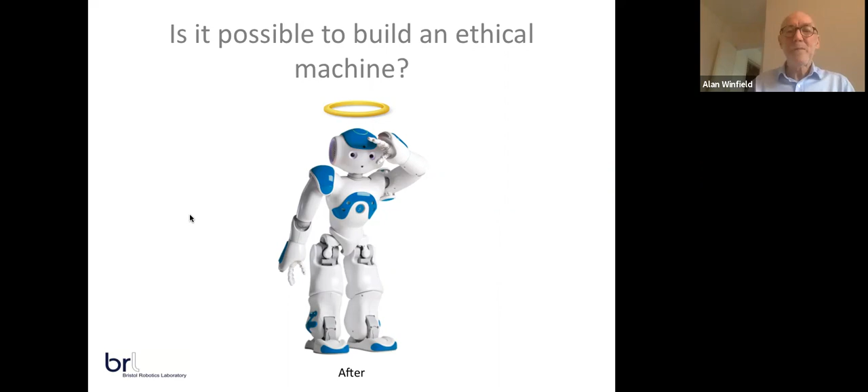Well, a long time ago, 10 years ago, I thought it was completely impossible, but I've changed my mind. And I'm going to show you how I changed my mind, what caused me to come to the view that it is possible to make at least simple ethical machines.

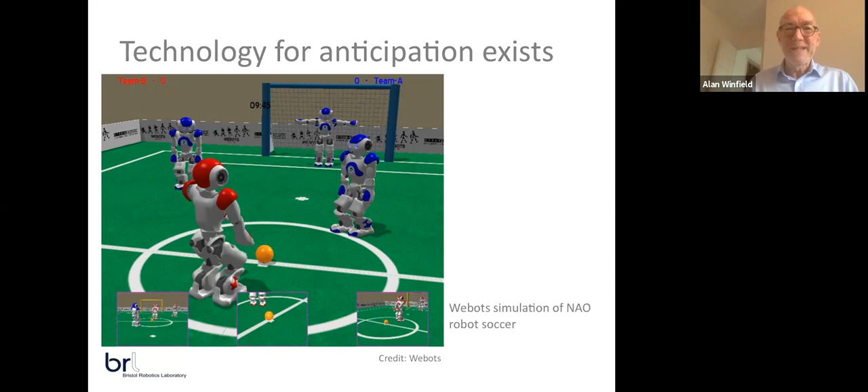And you can even see little images on the bottom looking through the cameras, the eyes if you like, of the individual robots. So robot simulation is a powerful technology. It already exists. We use it routinely to test out ideas in robotics in simulation before then trying them out on the real robot. It's quicker to do that and often less expensive.

Because of course if the idea doesn't work, then no physical robots or people indeed have been harmed by using the simulation. But the idea of putting a simulation of a robot inside that robot is very, very difficult. It's not new - I didn't come up with this idea, the idea of what is called simulation-based internal models, but not many people have done it. It's very hard to do technically. But nevertheless, we have achieved it. And this is the only bit of technical detail that I will give you, apart from that little bit of code earlier, or pseudo code.

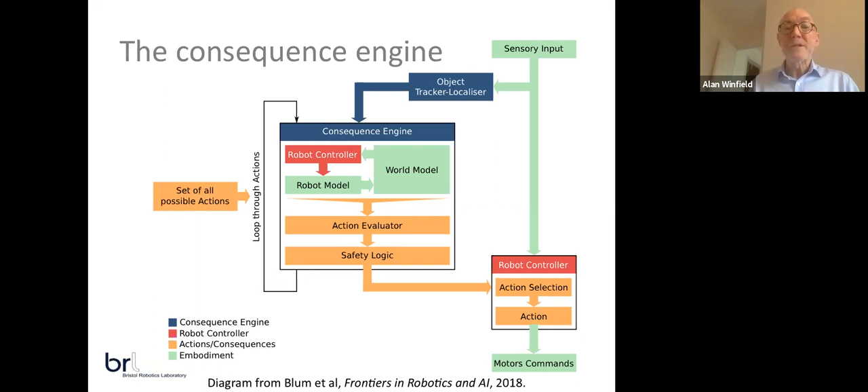And in the case of my simple thought experiment, it was 4 next possible actions. And for each of those, you look at what happened at the end of that simulation run, i.e. 10 seconds into the future typically, and then figure out how that applies to the logic. This picture shows a safety logic, but in fact what we'd actually do in the ethical robot is put an ethical rule - the ethical rule I mentioned earlier would be the logic that goes into there for a simple ethical robot.

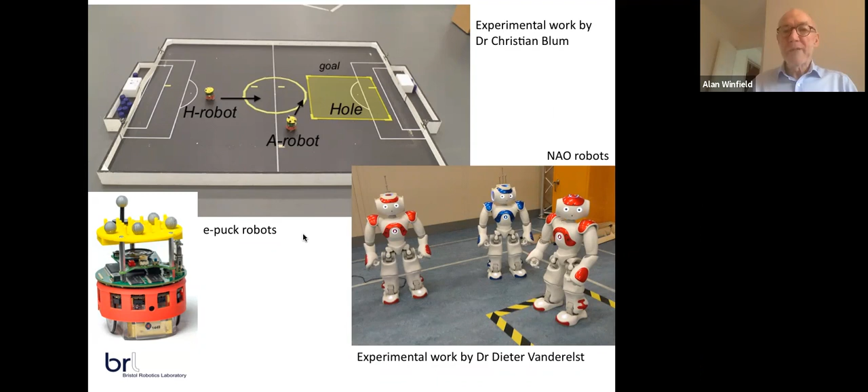The A robot also has its own objective, and rather confusingly it's called a goal, a goal position. So the A robot is also trying to avoid falling into the hole and is going towards that position - so it has something to do. In other words, the A robot isn't just sitting there waiting, but is actually moving towards its own goal position. So let me show you first the results of this particular experiment - this is the paper that we published back in 2014.

So you'll see initially the H robot, which is right there, and you can see the A robot starts to move, then notices the H robot, and there's a gentle collision. The H robot is heading off safely, and the A robot doesn't fall into the hole and goes to its target position. You can see we've speeded this up 4 times, 16 times, and 64 times. I think quite easily you can see that it works.

Let me explain a little bit of the technical side for those of you interested. The consequence engine is running twice every second. And for each of those half-second cycles, the consequence engine is actually simulating not 4, but 30 next possible actions. And for each of those next possible actions, it's simulating 10 seconds into the future. So that means every half a second of real time, we're actually simulating 300 seconds of potential future.

So it really is possible, and we're not using any supercomputer. It's simply running on a laptop, a regular laptop computer connected over the Wi-Fi network with the e-puck robot. So it's not computationally intractable, which is really obviously important. This technique wouldn't work if it required immense computation.

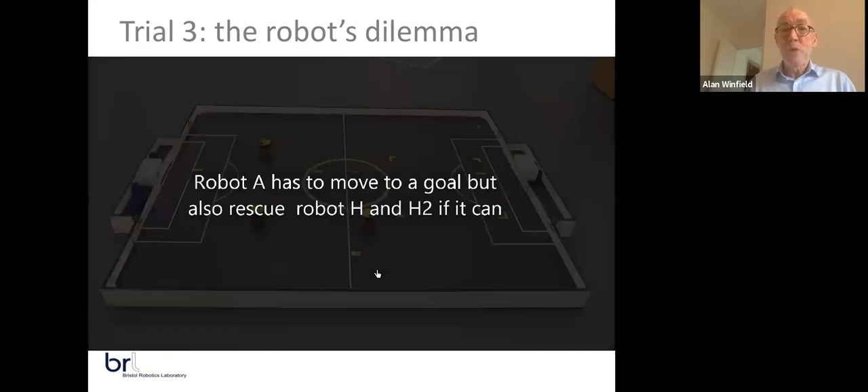So it was really, I'm just running that again. It was really puzzling to us as to why the A robot wasn't saving one of them every time, because we know it can. And it's this dithering that is the reason.

Essentially, we realized that the problem is that our A robot has the opportunity to change its decision, to change its mind, because it doesn't have a mind, but to change its decision every half a second. So that means that the robot is effectively

indecisive. It's a little bit like imagine that you're out at the park and you see two children rushing towards a lake, and it's unsafe, and you want to save them. And if you run towards one of the children, then change your mind and run towards the other one, and then change your mind again, if you do that, it's unlikely you'll save either of them. So being indecisive in this kind of real-time ethical problem is itself a problem.

And we realized that there needs to be an additional mechanism so that ethical decisions are, if you like, a little bit sticky. So ethical decisions have a half-life, that they're not simply superseded in the next cycle. And we think that would improve the performance of this ethical robot.

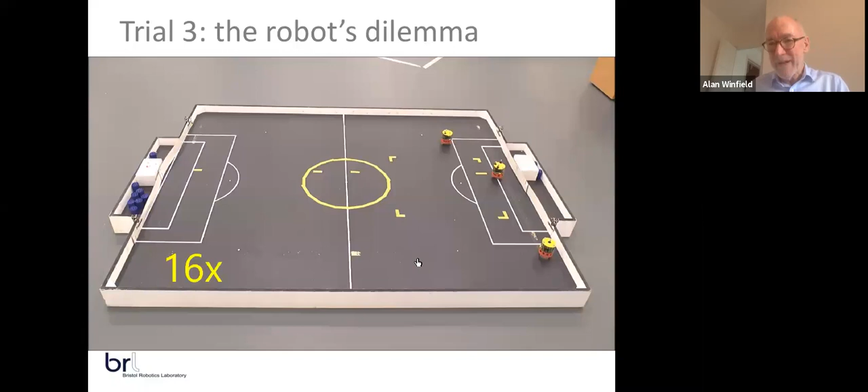But it was nevertheless extremely interesting, and the paper that we published ended up creating a bit of a fuss, both in the media and among the academic community, and it's been very widely cited now, this particular paper, largely because of the ethical dilemma, not so much because of the architecture.

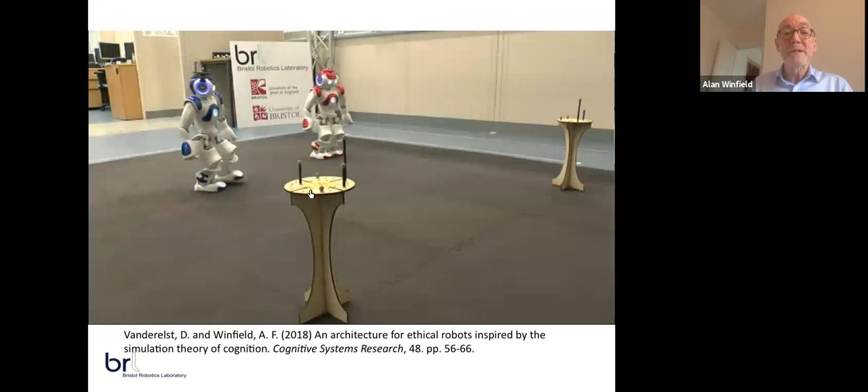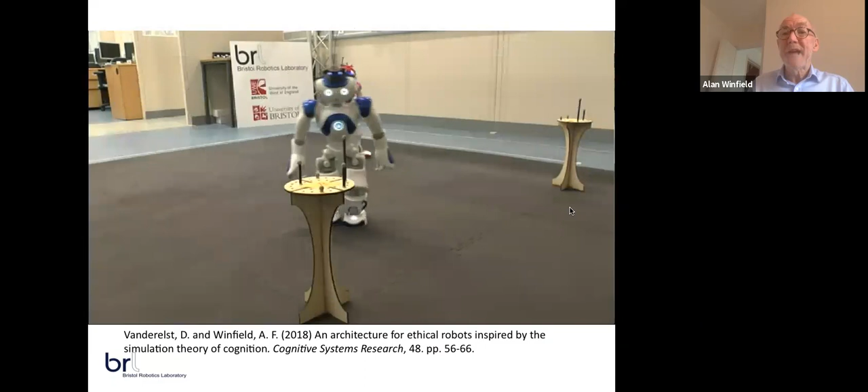But we tested the same architecture in 2018 with these NAO robots. Here, the blue robot is the ethical one. The red one is the proxy human. The blue robot is heading towards this pillar here. The red one has a danger zone over to the top right. You can see that the blue robot did stop the red robot from heading toward danger. It also made it to its own destination. This is all described in this paper.

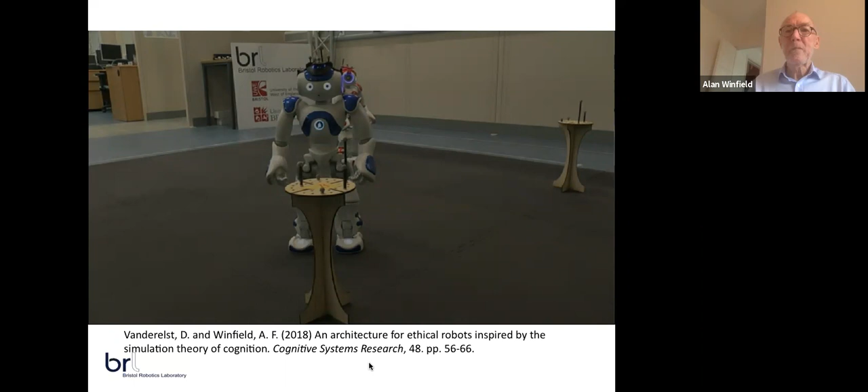And here we see the same ethical dilemma we saw before, but you can see that the blue robot, the ethical robot, initially heads towards this guy, but then changes its mind and heads towards this guy. So the interesting thing here is that it verifies that it's this ability to change its decision that is causing the ethical robot to fail to save both of the robots, if indeed it could.

It's worth noting that in the e-puck experiment, very occasionally, perhaps twice out of 30 something runs, the ethical robot did manage to save both of the proxy humans.

So how ethical is our ethical robot? Well, not very, of course, is the short answer, but it certainly does qualify as an ethical robot. It implements a very simple form of consequentialist ethics. But the important thing to understand is that the robot behaves ethically not because it chooses to, but because it's been programmed to do so. It's like an ethical zombie. It cannot choose its ethics. It can't choose to be unethical, but it behaves ethically simply because it's hard-coded to behave ethically.

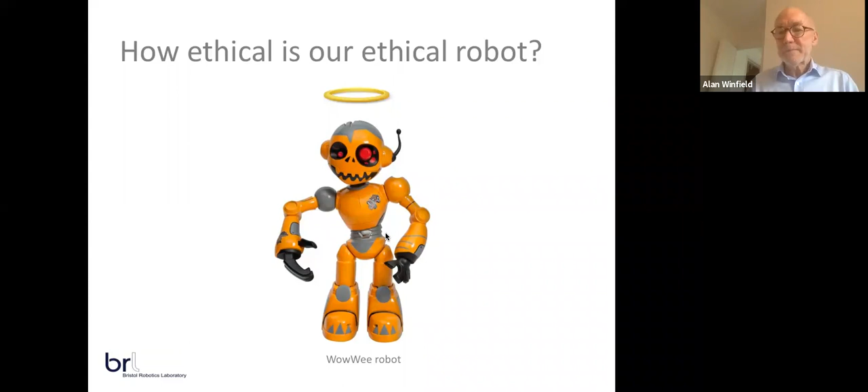And of course, we've hard-coded the rules in the robot. So one of the benefits of this internal simulation-based model is that we know exactly what's going on in the robot's brain - again, I'm putting quotes around that because I mean that only metaphorically. So we can look inside the robot and find out exactly what's going on during its decision-making process.

We think that is really powerful because it means that if something goes wrong, you can find out exactly why. As part of our accident investigation work, Marina and I proposed some years ago that all robots should be fitted as standard with the robot equivalent of a flight data recorder. In other words, we call it an ethical black box.

These of course are fitted as standard, as you know, in all aircraft. It's a fundamental requirement of commercial - well, in fact all aircraft have to be fitted by law with these data recorders. We think that robots should also be fitted with data recorders, not just ethical robots, but all robots. We think it's absolutely fundamental. Otherwise you simply cannot investigate accidents after the event.

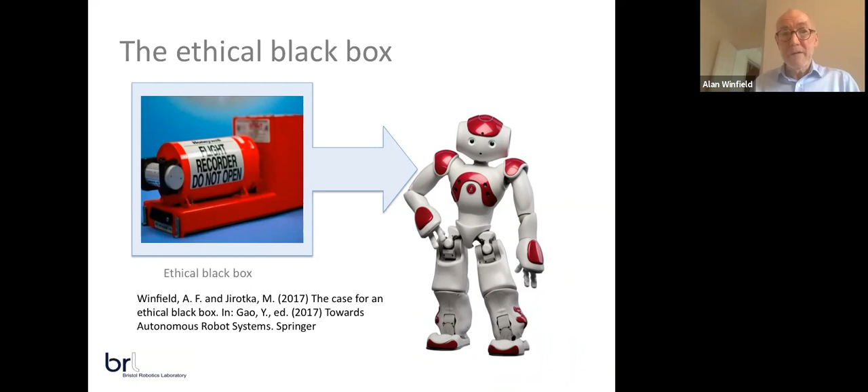And again, I could give a whole lecture on robot accident investigation, and indeed we have a new paper on robot accident investigation, which is on arXiv. If you're interested, I can send you a list of all the relevant papers afterwards. And yes, the project we're working on, it's a 5-year EPSRC funded project called RoboTIPS, Responsible Robots for the Digital Economy, if you're interested in that particular work.

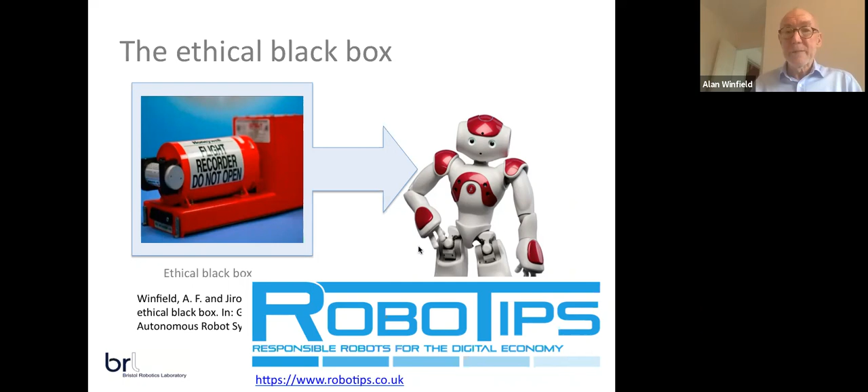So just to finish my segment and indeed the lecture, one of the things I realized when we built these simple ethical robots is that we don't need a major breakthrough in artificial intelligence to build an ethical robot. In other words, we don't need to wait until we can build a robot like Data in Star Trek. They're very minimally ethical, but nevertheless, we can build simple ethical robots.

Now, actually, there's a different question. If we can build robots, that's okay - we've shown it in the lab, ethical robots. The question though remains: should we build ethical robots? Is it ethical to build ethical robots? That again is the subject of a whole other lecture. Perhaps we can talk about it in the Q&A.

But again, if you're interested in machine ethics, myself and my colleagues Katina Michael, Jeremy Pitt, and Vanessa Evers prepared and published a special issue of the Proceedings of the IEEE on machine ethics, which focuses both on the design and the governance, the ethical governance of ethical AI and autonomous systems. The editorial paper, called The Design and Governance of Ethical AI and Autonomous Systems, explores all of these questions of ethical governance, the question of whether you should build ethical machines, even if you can.